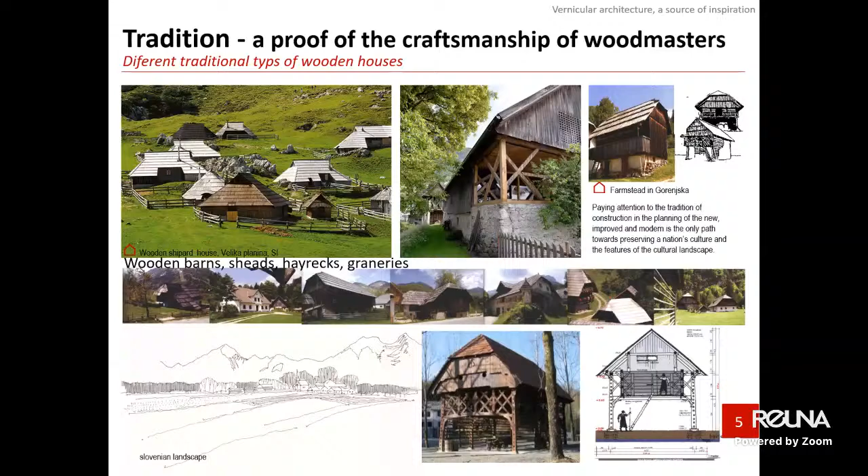And the biotechnical faculty has several departments, like biology, landscape architecture, agriculture, forestry, and also the Department of Wood Science and Technology, where I belong. So maybe our study program is also interesting. We have bachelors in the first cycle, accepting around 80 students, then followed by a master program. So bachelor is 3 years, master is 2 years, and afterwards you can choose a PhD program.

I think for you it would be very interesting maybe to come as a master student or as a bachelor in the first cycle through the Erasmus Plus system. We have a contract, so it is open for you and your professors and teachers to come. Maybe it's also interesting that we established the dual degree program with Luleå University in Sweden, which runs on the master, on the second cycle.

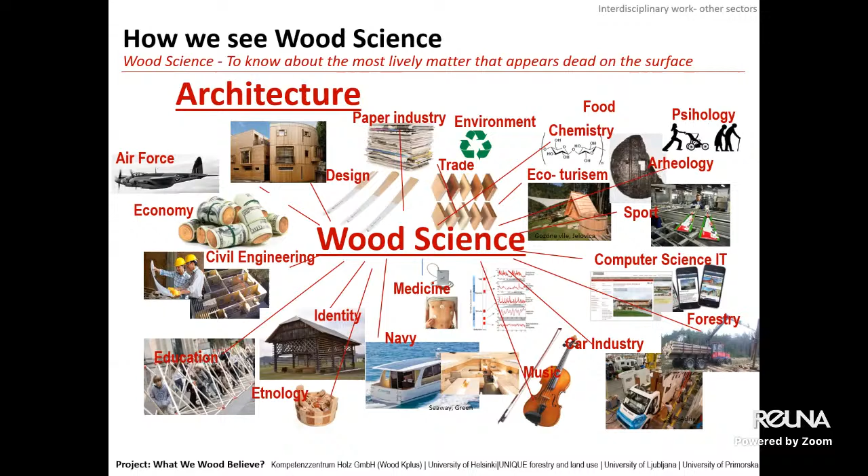Especially wood science is connected with architecture, with civil engineering and forestry, but also with other sciences, which will absolutely change the perception of using wood as a sustainable and contemporary material. So my research focused primarily on the advances in timber constructions, and we put an emphasis on personal tutoring and work in small groups.

The system, please, the translator system started working. It's like exactly, yeah. We wait a few minutes because we sent the information to the students.

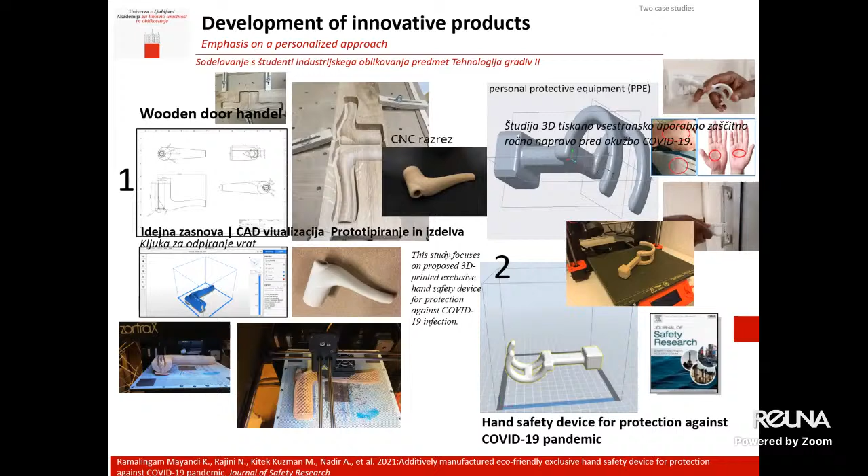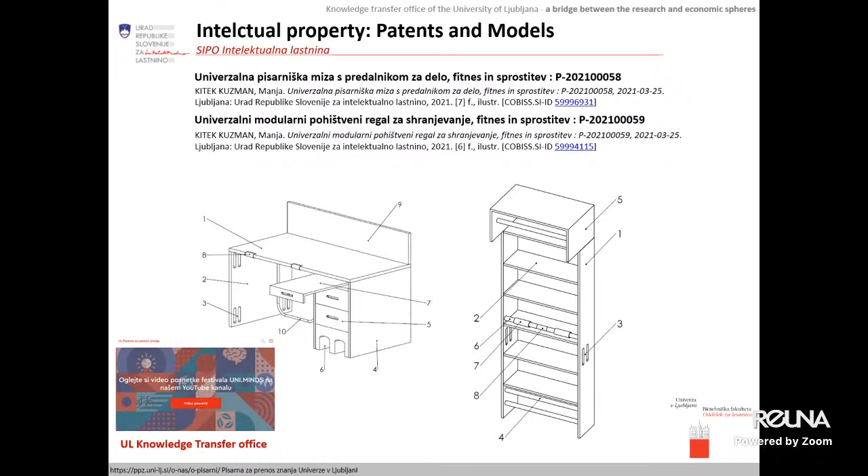So learning by doing, and we know that these demonstration projects are so important to show the possibilities with timber construction and the challenges for the students interacting with wood scientists. There are some projects that we develop, and especially we put the emphasis also on intellectual property, where the students are taught how to write patents and models.

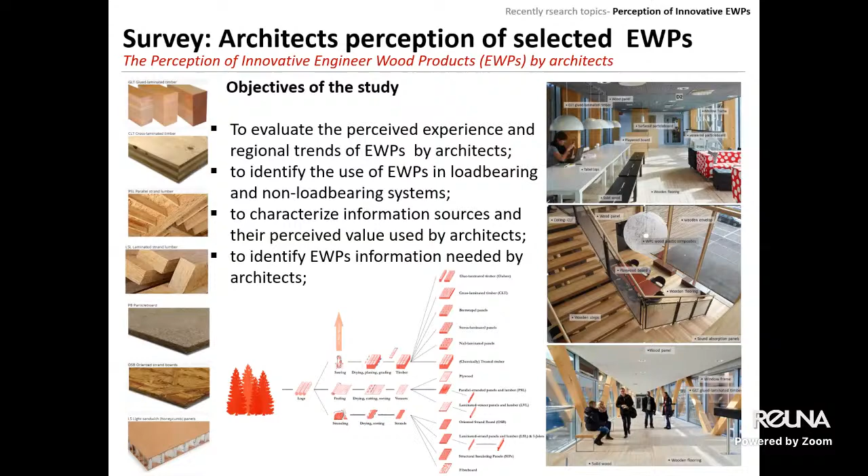Lately, there was a survey about the perception of engineered wood products by architects, which resulted in several publications and books, because we know that wood science results are too rarely communicated to architects, because we architects are the ones who use them. So there are great examples of using new engineered wood products in the built environment with emphasis on interior and exterior diversity.

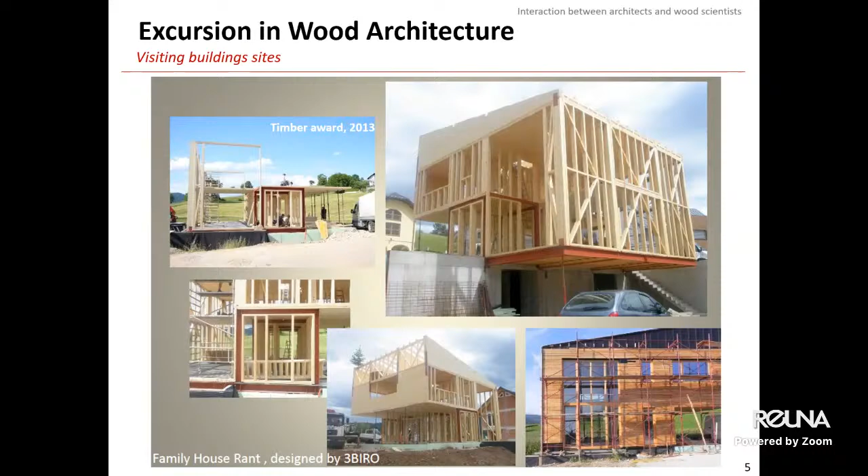We want to cooperate a lot with industry. So already in the study time, students are involved in the process of practical work with companies, and we run field excursions every Friday, where students can learn about different technologies used in timber buildings.

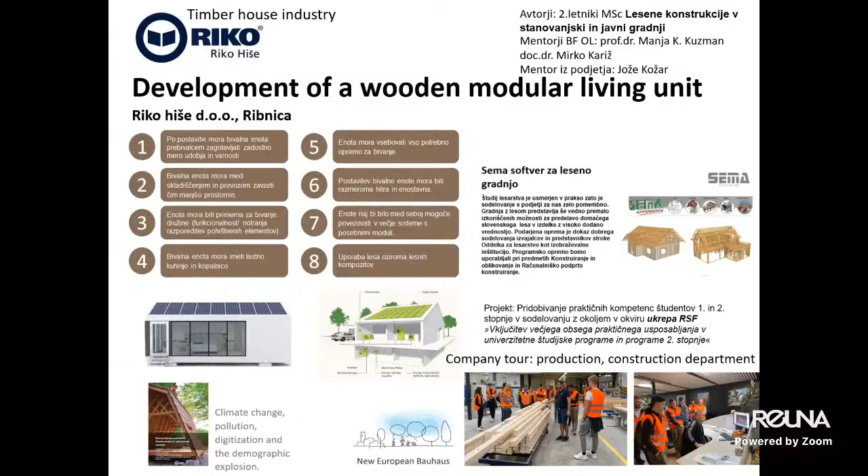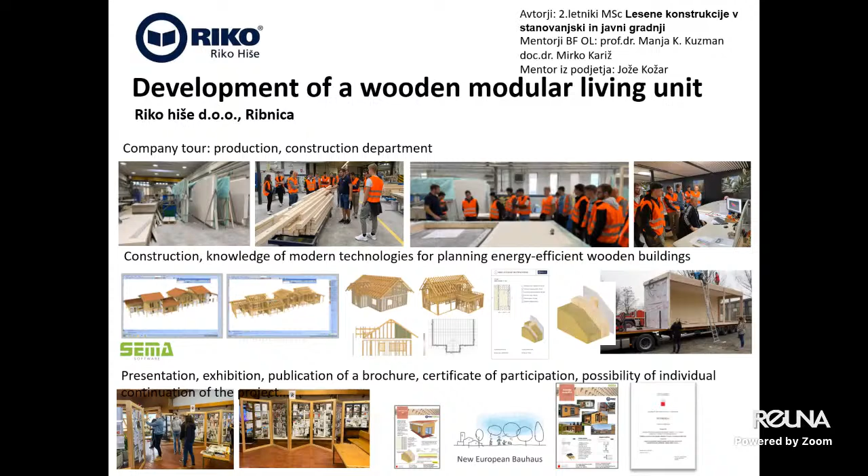This is an example of the projects that students then do under the supervision of industry. So firstly, we go to the company and check the production and especially the construction department. And then students plan their projects, and the projects also result in different exhibitions.

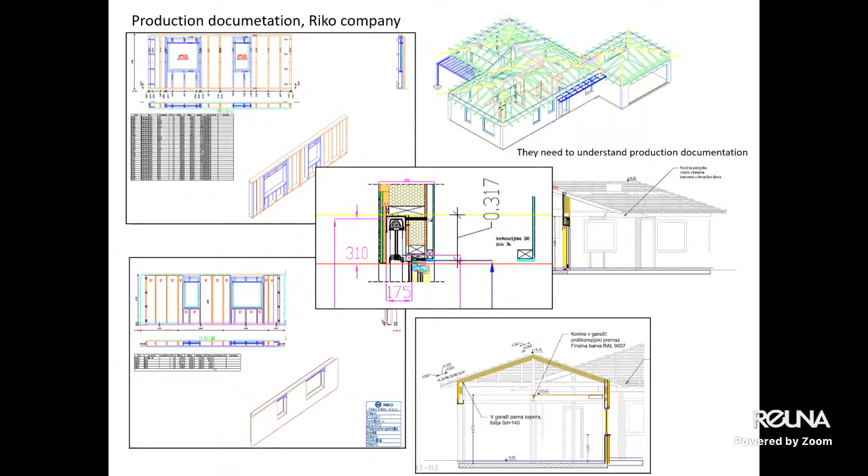This is an example. We are using SEMA software, but there are some other alternatives. And also, after the students made their projects, they also follow some buildings in the building process.

We are cooperating with different companies, and there is a big emphasis also on the demonstration of company products. I also heard that you cooperate with Rothoblaas. Yes, and this is also very good, because the companies are donating us the material that we can then use for the pilot projects. Absolutely, we need to be in line with the industry, and that reflects in our study program.

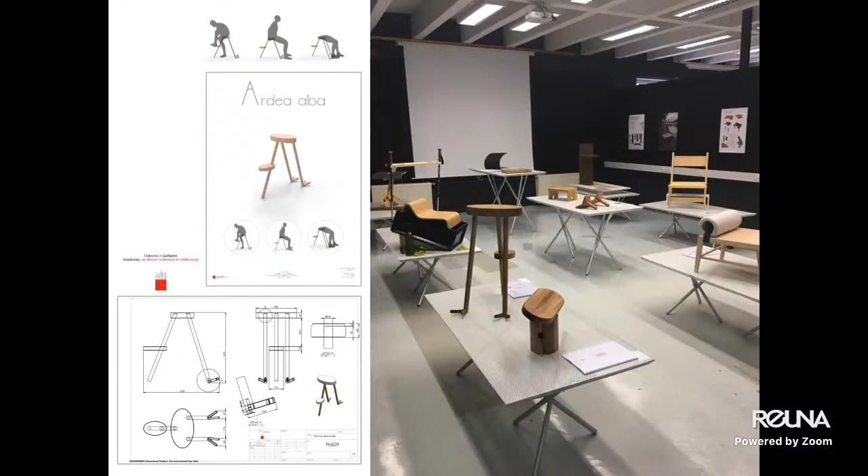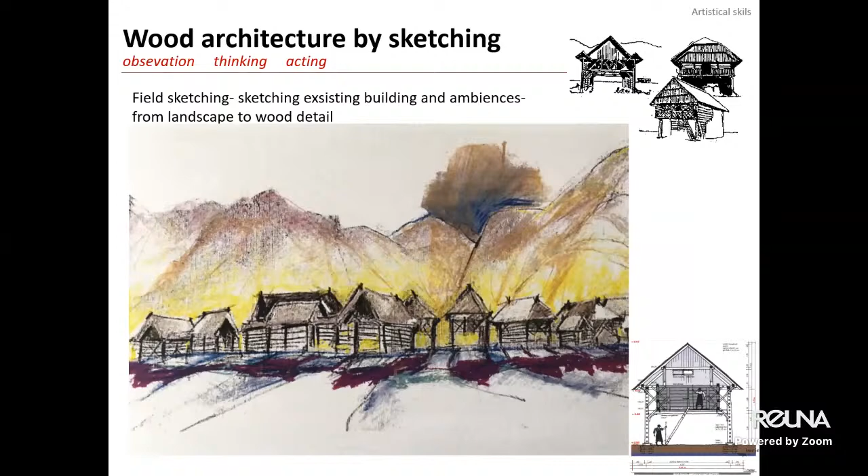But we're not cooperating only with civil engineers and with the companies that are orientated in timber buildings, but also with product designers, industrial designers, and this is an example of a project that we run, and then also made the exhibition and showed how the cooperation and teamwork between different study programs could result. And we are also artistic and developed artistic skills, and I think that you are also very good in sketching. So some photos of our exhibitions.

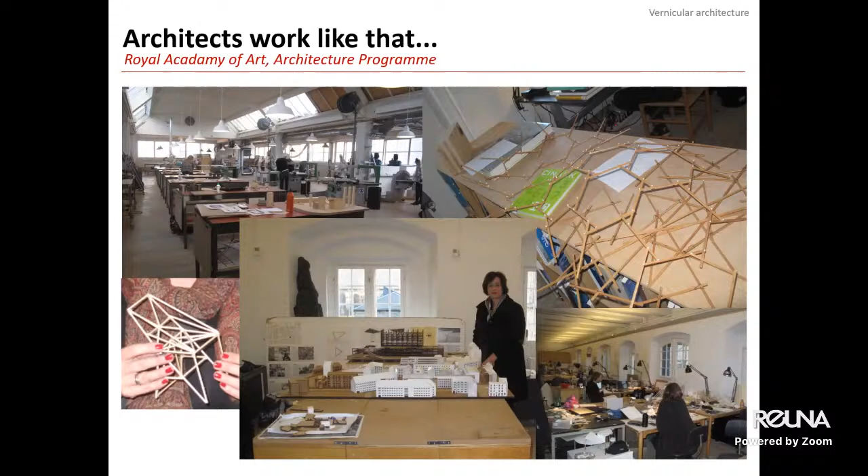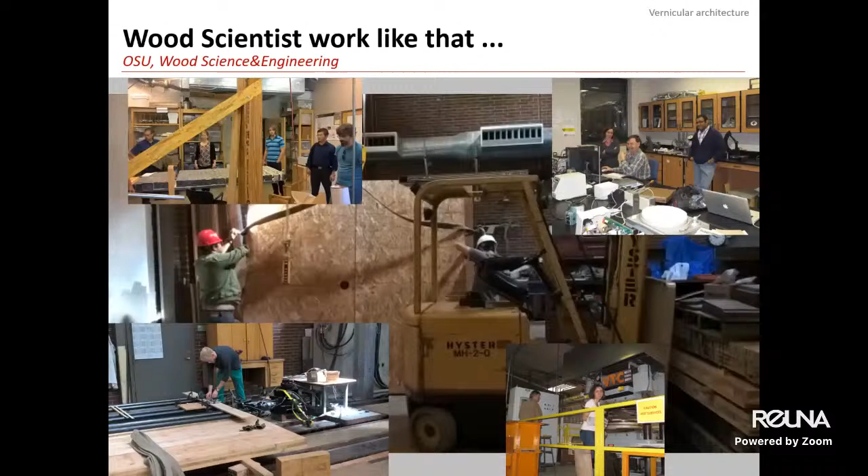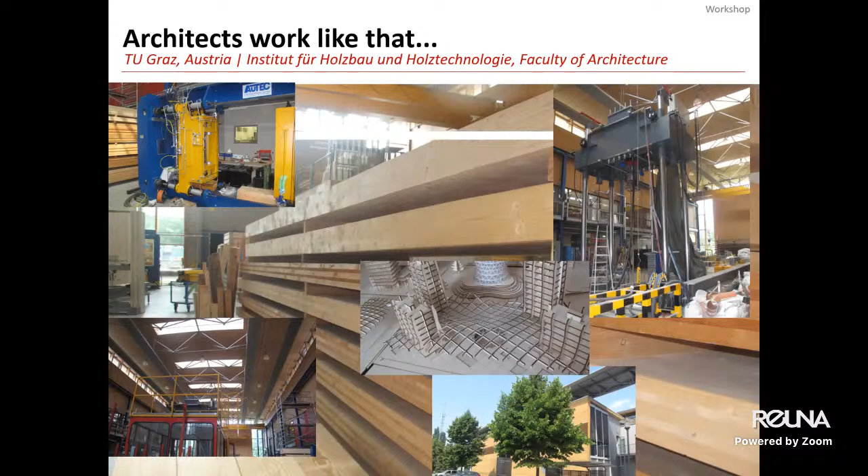It is our teamwork that starts everywhere in workshops. Sometimes it is more connected, the architects with civil engineers and the wood scientists. A very good example is the Technical University Graz, which is very close to Ljubljana, our town in Slovenia, where they developed a good way and study interaction between architects and civil engineers, but they're also in the same building, so this may be also some advantage. We believe that architects, civil engineers, and wood scientists need to learn to cooperate already in the time of study.

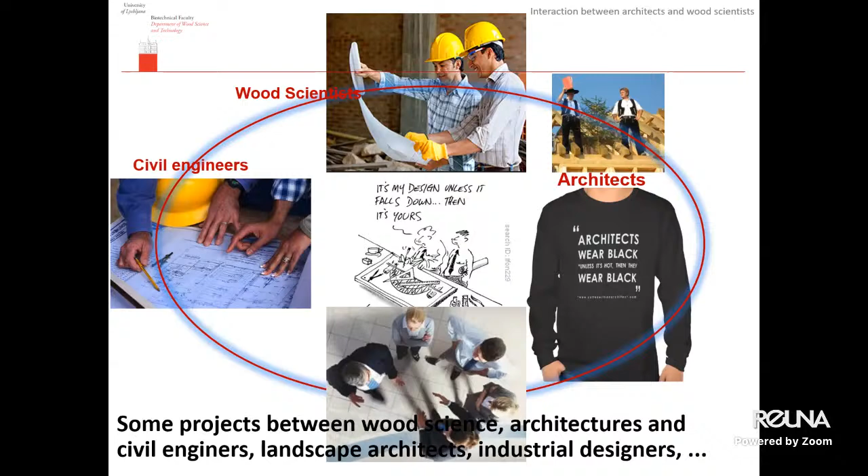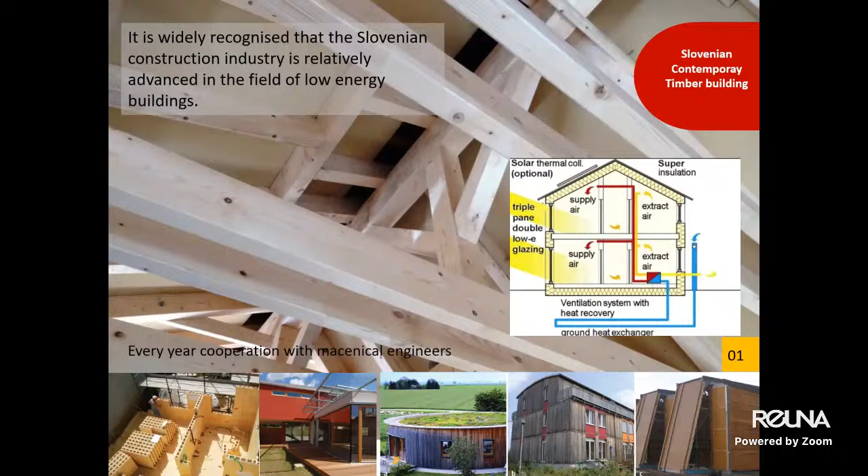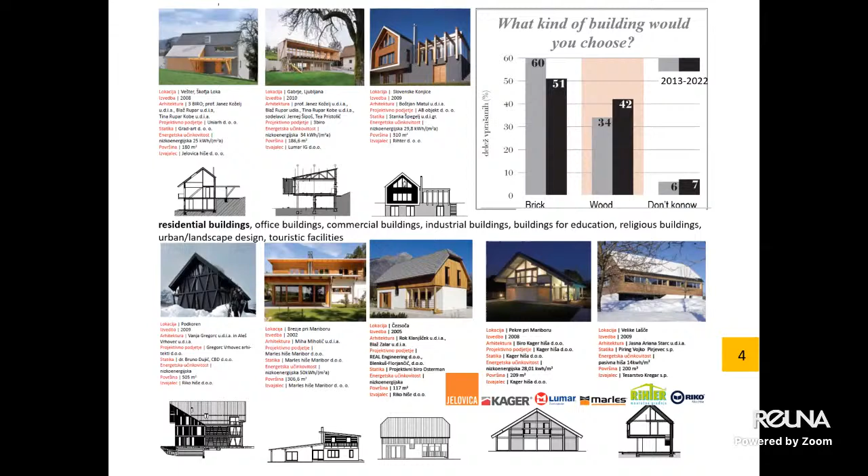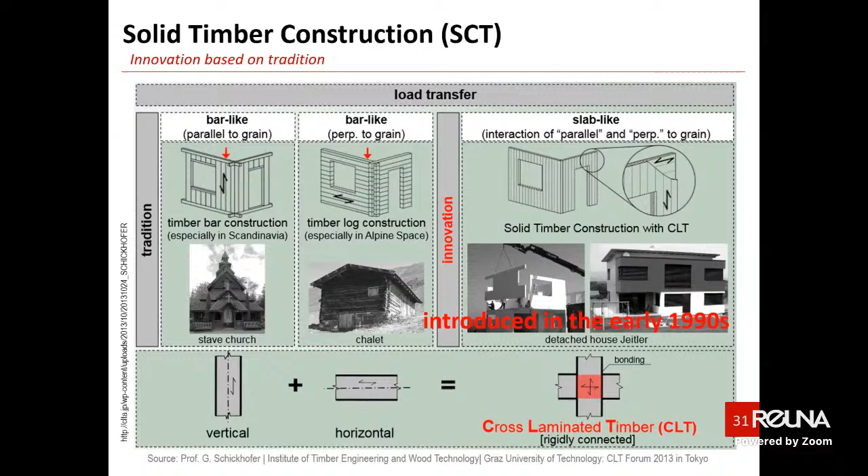Now I would like to show some advanced projects, Slovenian timber architecture, because we are recognized as very developed. And also we have a green public procurement regulation, which requires that 30% of inbuilt materials by volume must be wood or wood-based for the public buildings. Most of our buildings are very energy efficient, almost passive houses, and we use a timber frame system, panel system, which also is nowadays very comparable with CLT, the innovation that is based on tradition.

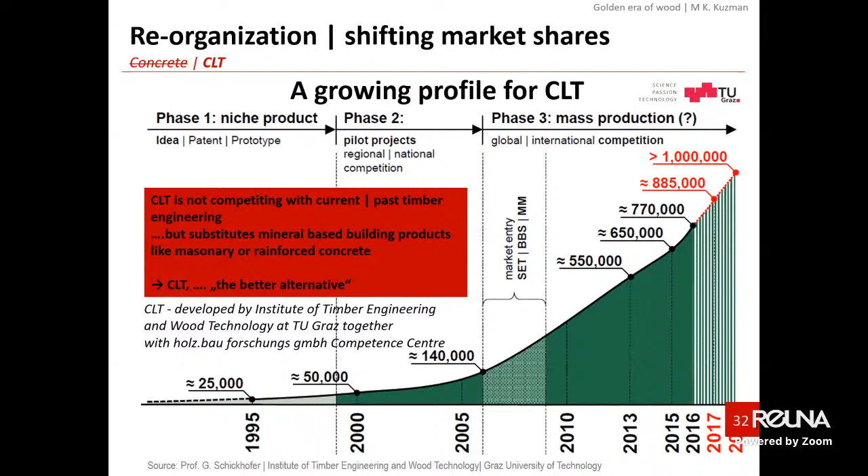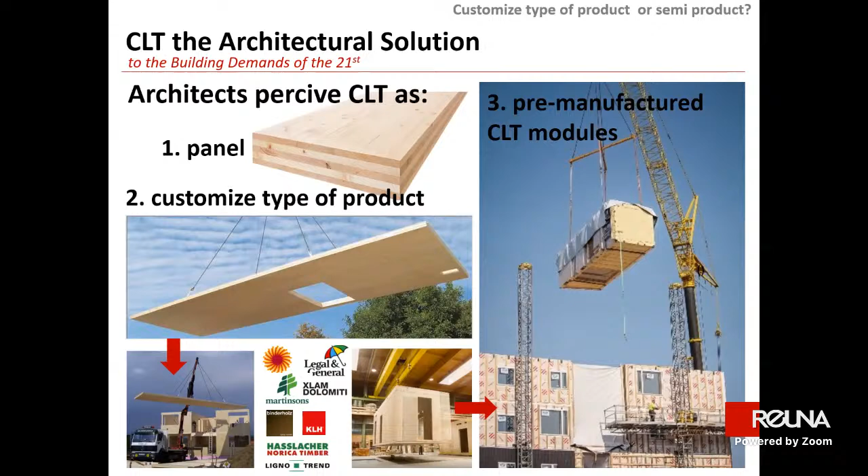It is very interesting how it was introduced in the 90s when it was a niche product, and then in a second phase, it was used for some pilot projects that architects used and won national and international competitions. And in the third phase, nowadays, we use it really very much, and the architects perceive this product as a panel, a customized type of product, or pre-manufactured CLT modules.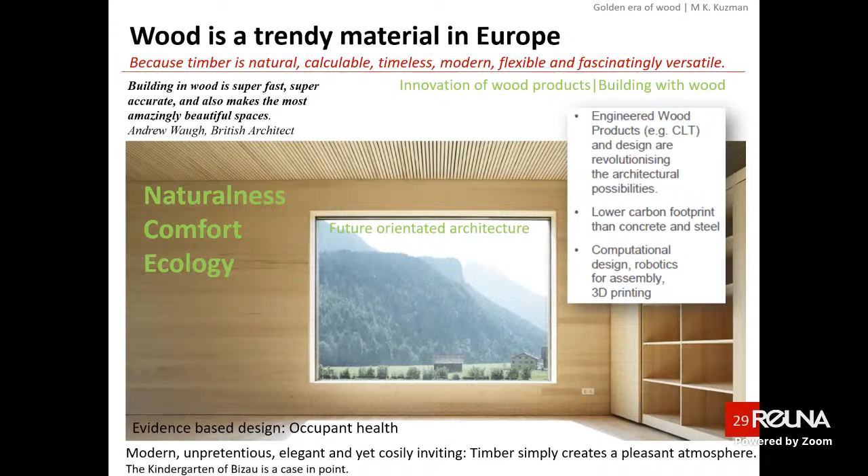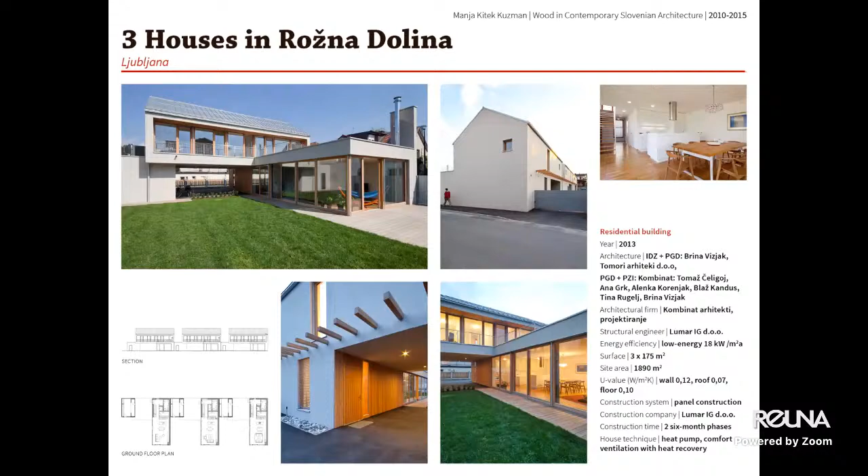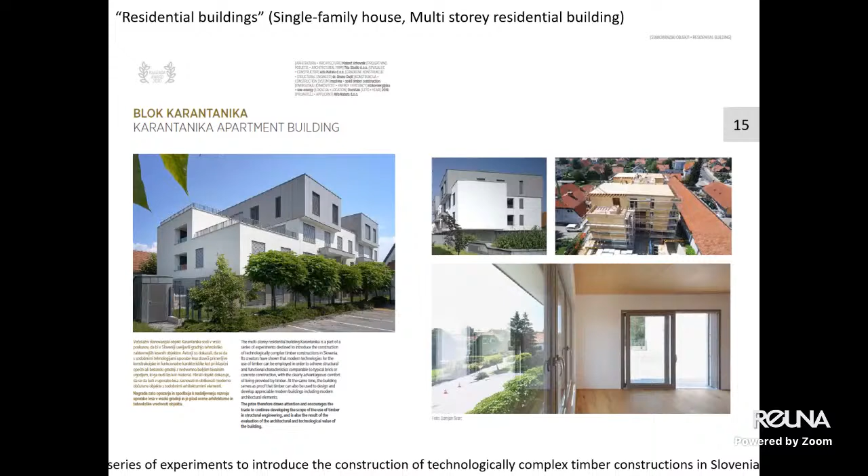Wood is absolutely a trendy material in Europe and is connected with naturalness, comfort, ecology, and we want to show good national projects as pilot projects through the National Award for Timber Constructions to present different types of projects. And I will just pass quickly: timber construction is not used only for individual buildings, but also for different kinds of buildings. Also, multi-story buildings. So this is an example, multi-story for us is about 3 stories.

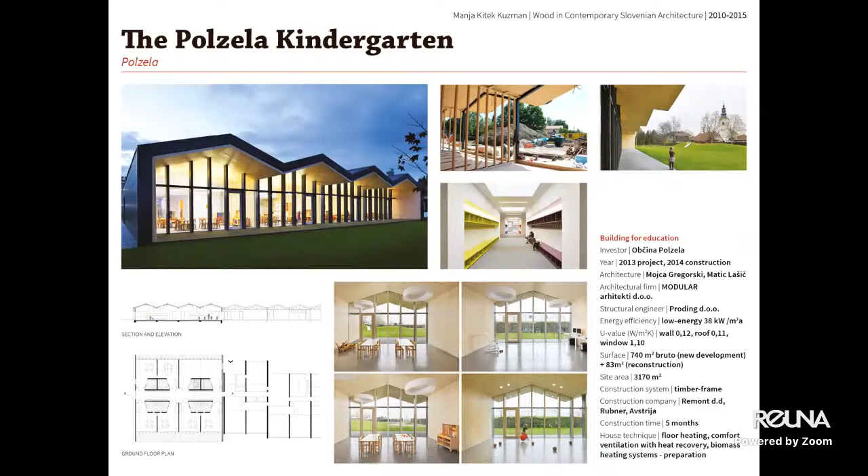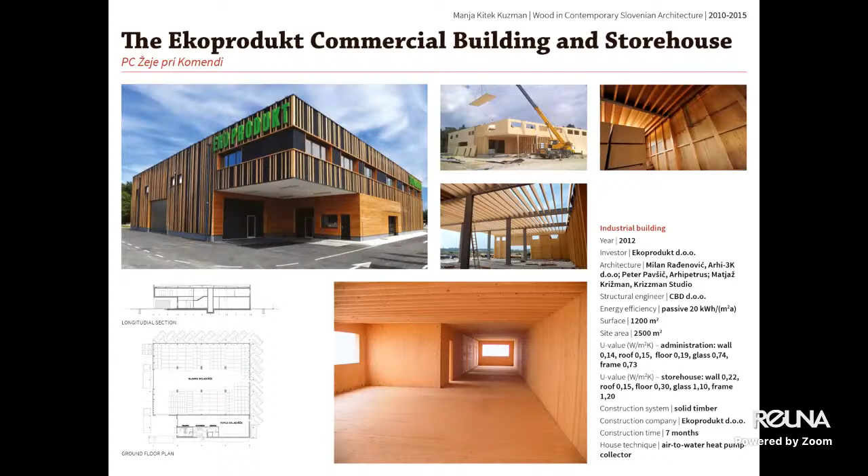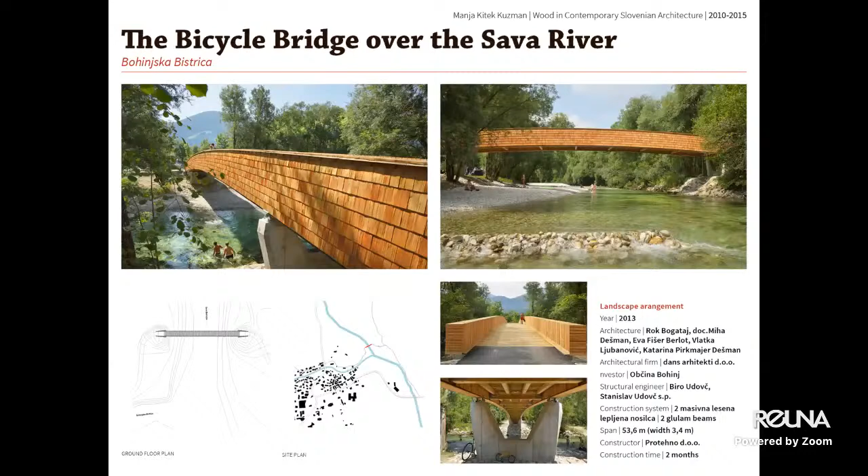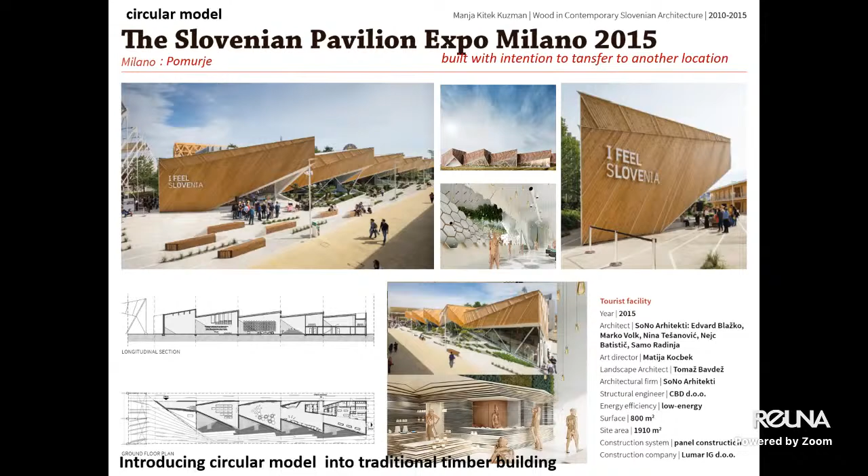Also some modular buildings are introduced nowadays, but also public buildings like kindergartens, school objects, youth hostels, hotels, industrial buildings, sport facilities, and some tourist buildings that show also a good integration into the landscape. We are introducing also circular economy in timber buildings. This is an example of the Expo Pavilion in Milano that was supposed to move to another location after the use, and it is a very good example.

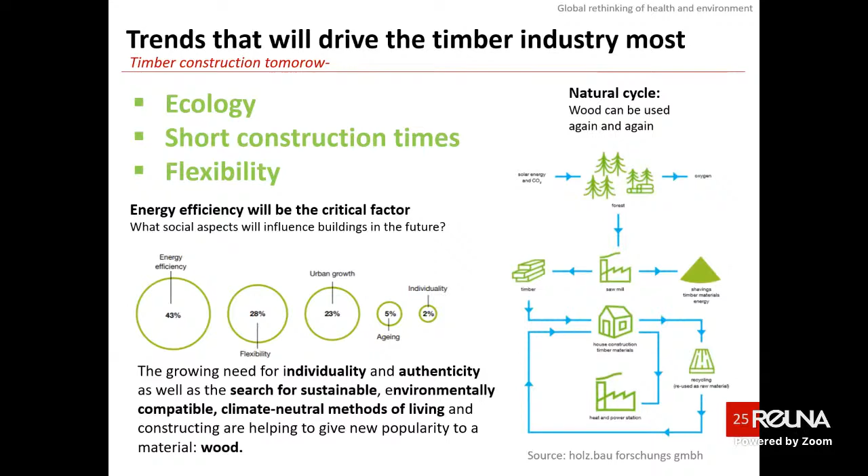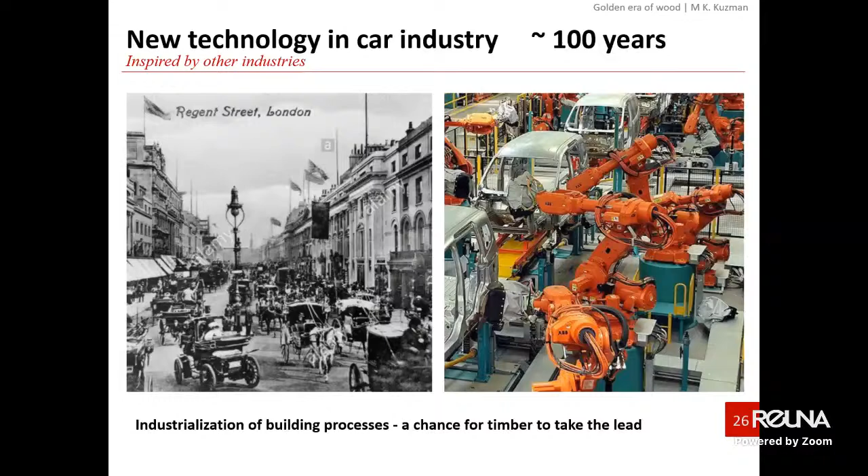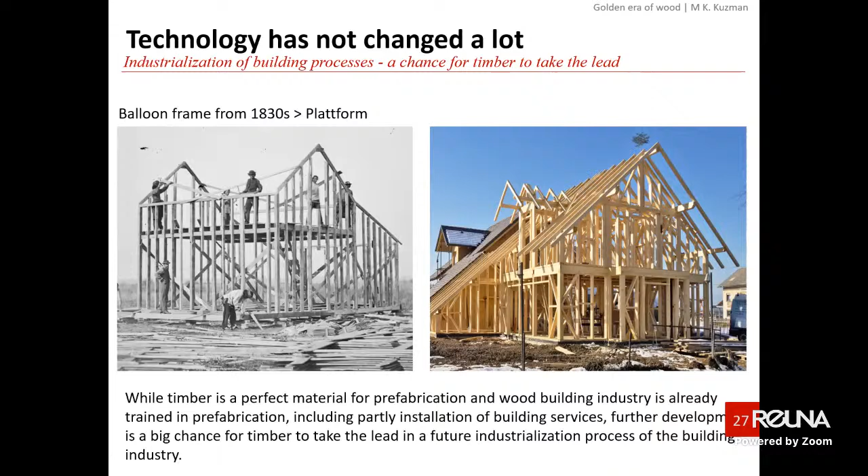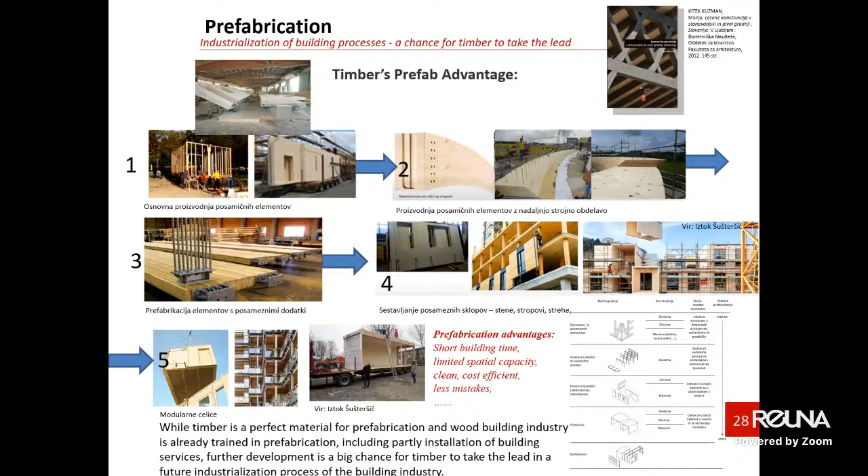So trends in the future that will influence the use of timber are ecology and short construction times, flexibility, but for us, absolutely the energy efficiency is a very important factor. We should be inspired by other industries like the car industry, where new technology really changed in the last 100 years. But we believe that industrialization of building processes is the chance for timber. And this is a perfect material that offers prefabrication, which results in short building time with a clean and efficient way of building, fewer mistakes, and some others.

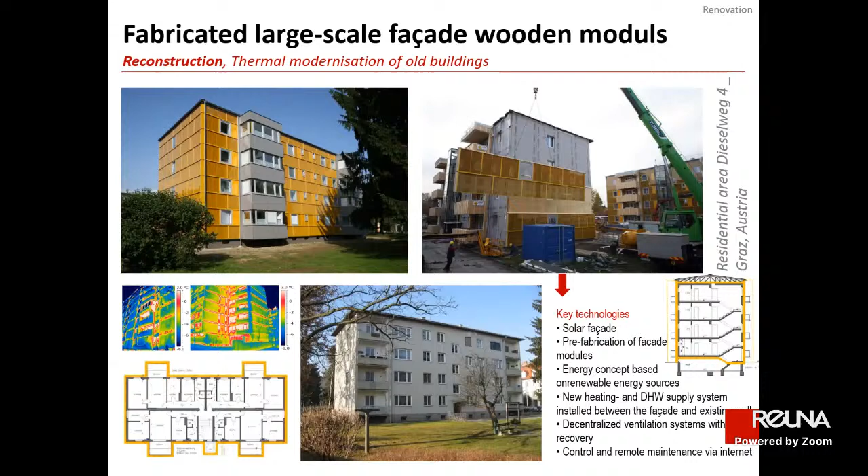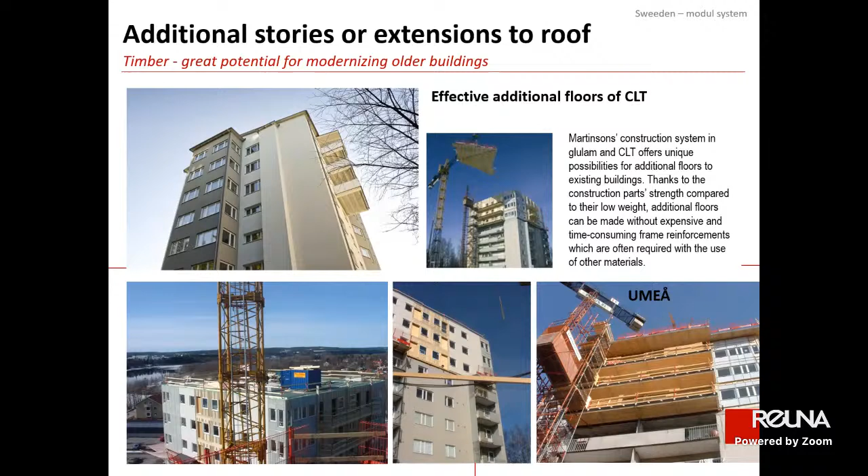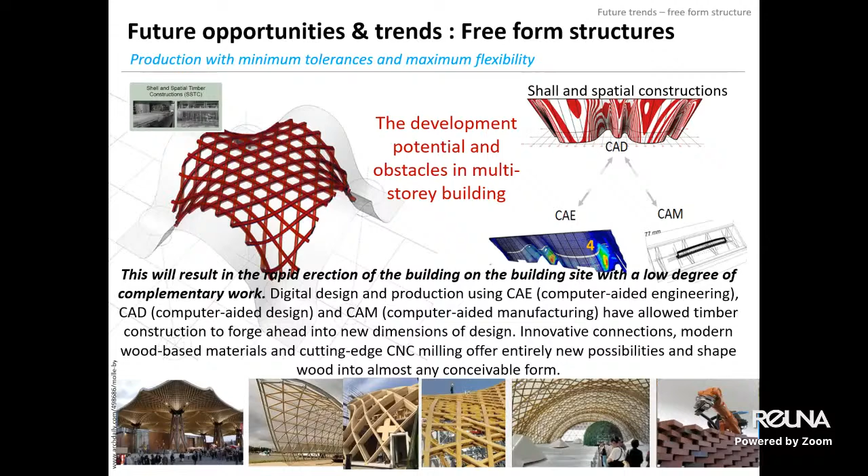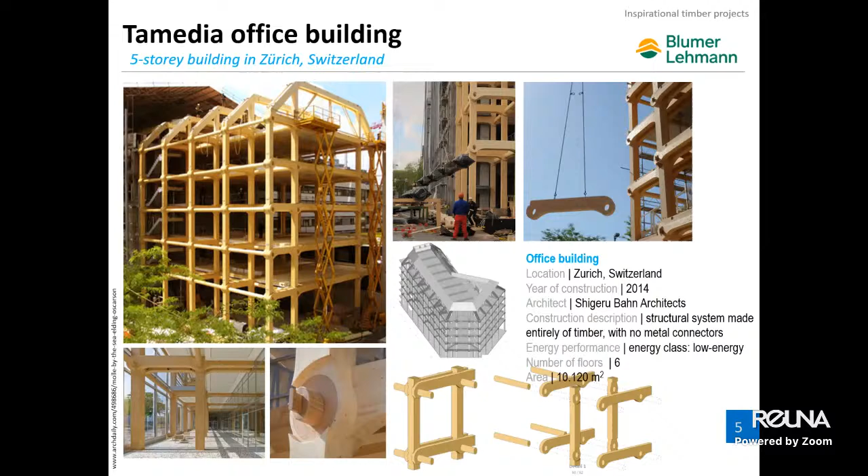Also, the challenge is reconstruction, the thermal modernization of older buildings with timber panels, reconstruction, or additional stories which could be built with a light timber construction. Vienna is a very good example of a modern city that increased building height and density with timber constructions. Also, the future opportunities are parametric design, production with minimum tolerances and a huge flexibility. An especially big challenge is multi-story buildings, some great projects that I believe you know. Maybe it's very good that you check some producers. Blumer-Lehmann is one of the most developed Swiss companies, cooperating with Shigeru Ban.

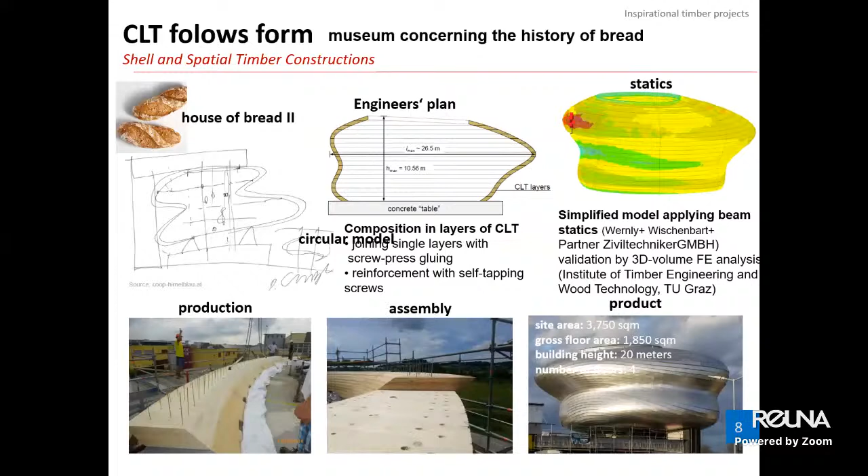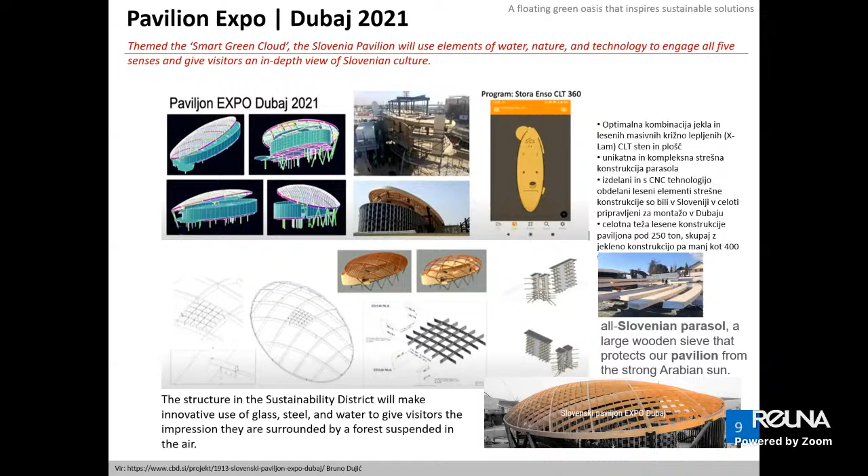So the last project is a Slovenian Expo Pavilion in Dubai, which was also a very advanced construction. It was formed like a parasol, a large wooden construction, parametrical design.

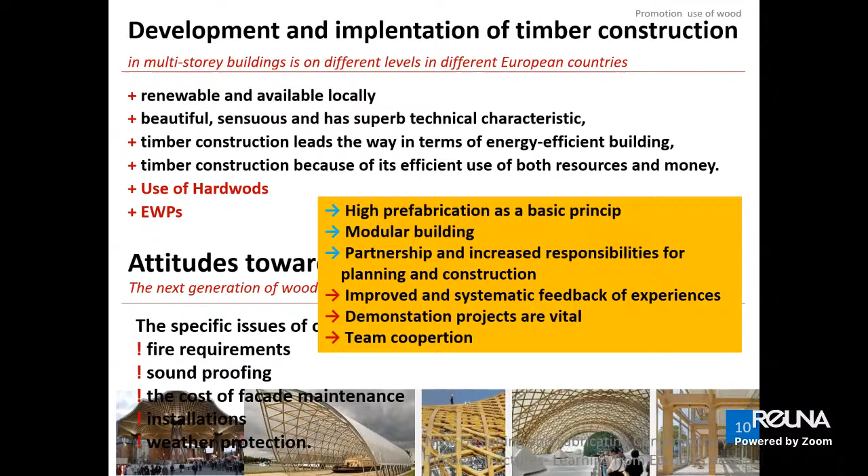So the challenges are, besides knowing that this is really the best and renewable material that we can use nowadays, also to use more hardwoods and new engineered wood products. We know that there are some issues with timber constructions like soundproofing, fire requirements, weather protections, but still the big challenge is high prefabrication as a basic principle, more modular buildings, and increased partnership responsibilities for planning and construction as a team process.